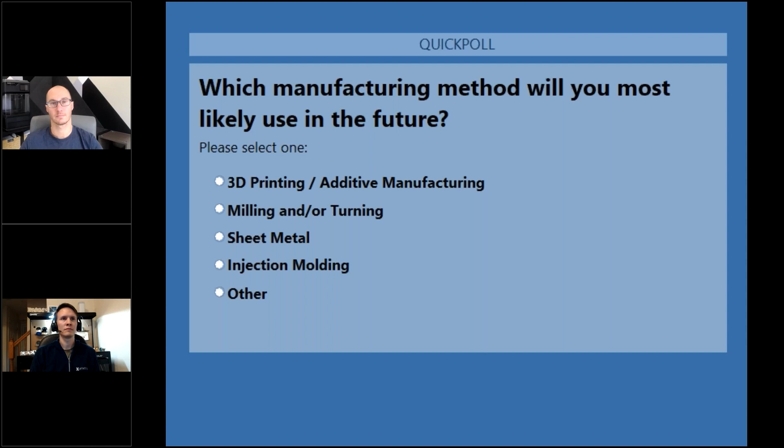Please let us know, which manufacturing method will you most likely use in the future? 3D printing / additive manufacturing, milling and/or turning, sheet metal, injection molding, or other. We'll give you a moment to respond. So here are the results. At 36%, we have 3D printing / additive manufacturing, 29% selected milling and/or turning, and tied at 14% selected sheet metal or other. Thanks so much for that.

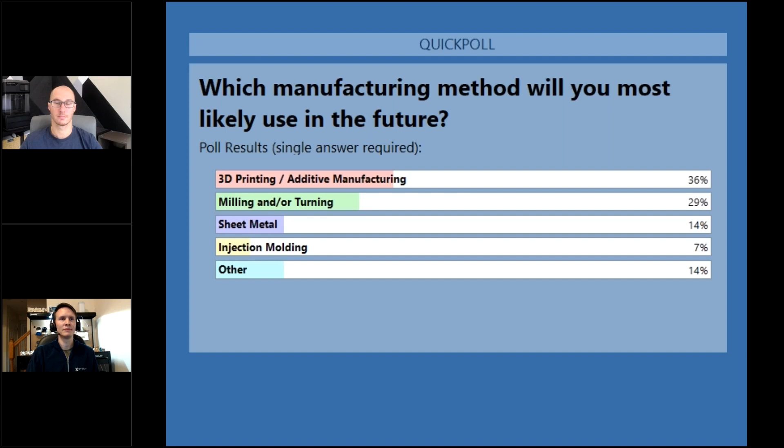And we're going to launch one more. Please let us know, what is your current or primary CAD software? Fusion 360, Inventor, SolidWorks, Creo, CATIA, NX, or Onshape, or other. We'll give you a moment to respond. And here are the results. 36% selected Creo, CATIA, NX, or Onshape, tied at 29% selected SolidWorks or other, and 7% selected Fusion 360. Thank you for everyone who participated.

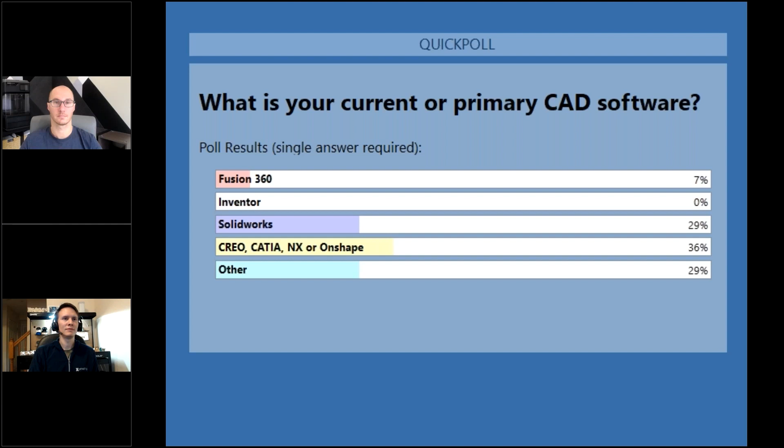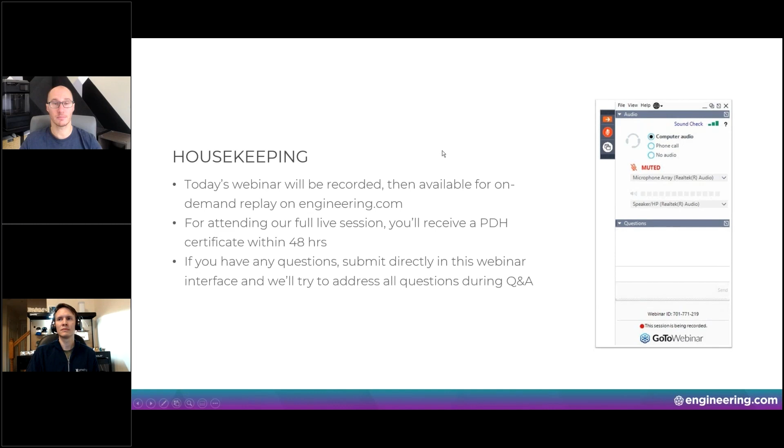Today, we're going to be talking about avoiding production pitfalls using manufacturing-aware generative design. We have a packed agenda, so let's actually go through that agenda together. We're going to tell you a little bit about ourselves, as we're going to be talking quite a bit today, so we want to have you get to know us. We're going to give you an intro to Autodesk and to Xometry. Perhaps you're only familiar with one of those two companies. We want you to be familiar with both. Then we're going to hand it over to Greg. Greg is going to talk all about what DFM is and what that acronym actually stands for and why it's important. And then I'm going to take over.

We're going to talk a little bit about generative design, how it actually works, and we're going to cover things like how does it create manufacturable geometry automatically, what manufacturing techniques or technologies does it solve for you out of the box, and how you can influence the shape of the part by adjusting the manufacturing inputs. Then we're going to talk a little bit more about Xometry and how you can use the Xometry for Fusion 360 app to get DFM or design for manufacturing feedback, as well as instant quotations for third-party manufacturing. Finally, we're going to talk about how you can modify a generative design result for alternative manufacturing methods.

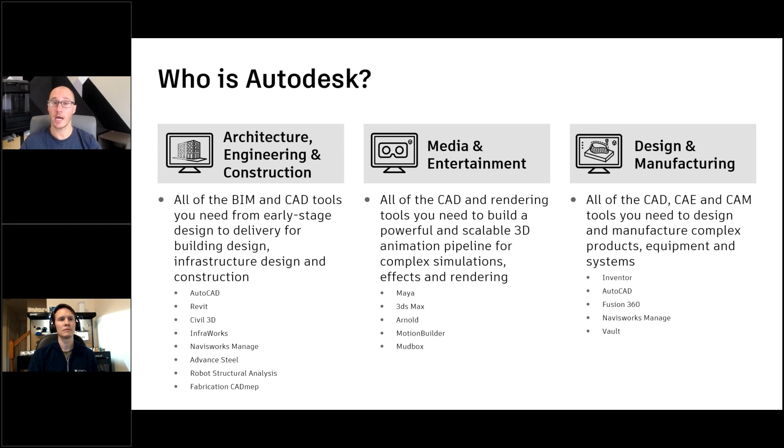But I'm in the design and manufacturing sector. And the design and manufacturing sector is all about taking ideas and turning them into real products, physical products, whether they're simple or complex, whether they're individual products, equipment, or even systems. Again, we have a variety of different products within that category, but I represent Fusion 360. So what is Fusion 360? Fusion 360 is a platform.

It's CAD or computer-aided design, it's computer-aided engineering or CAE, and it's computer-aided manufacturing or CAM. It can be used for anyone and by anyone, starting with industrial design to mechanical engineering, electronics engineering, manufacturing, and even production as well. Again, Fusion 360 is intended to be the platform so that everyone in your team working together can help design and then manufacture that product.

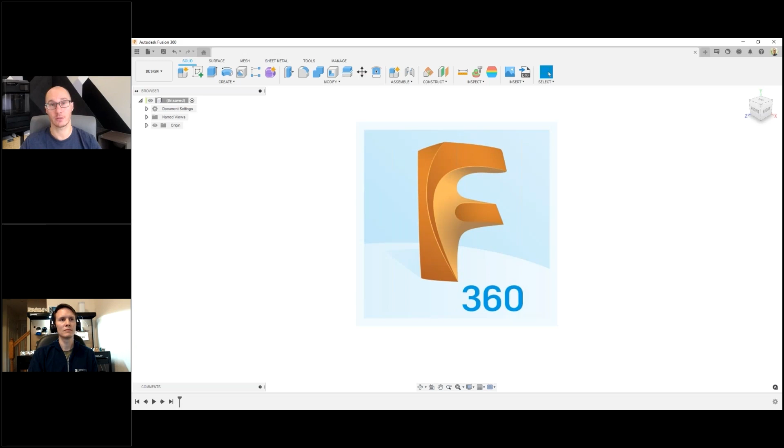Fusion 360 is cloud connected, and that enables you to have automatic file storage and versioning, as well as easy collaboration amongst your team, both internally and externally as well. Fusion 360 does a lot of individual things, but the most important thing to note is that it's not about any one of those things, it's about being able to do all of those things under one platform.

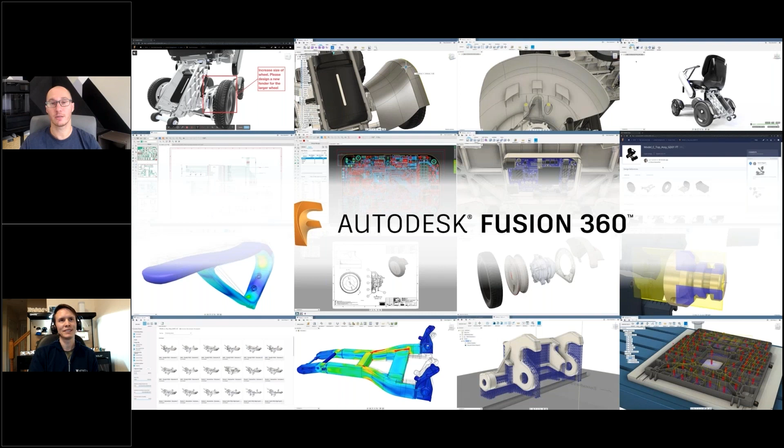Today, we are going to be focusing specifically on generative design, and it is my pleasure to represent the Autodesk side of things. But we also have Greg from Xometry. So with that, let's hear a little bit about who Xometry is. And with that, we have a quick video to play for you. It's just a moment while I turn that on.

What if you could access the world's manufacturing capacity with a few clicks? What would you build? Xometry puts manufacturing at your fingertips. Get instant online quotes on 3D printing and CNC machining. And access thousands of manufacturers worldwide. With Xometry Manufacturing on Demand, it's your time to build. Visit Xometry.com today. Short and sweet.

Yeah, so that's a little preview of what Xometry does. And what we are is a global manufacturing marketplace. And I always like to tell our customers, what's in it for me? We make a ton of parts. We can make parts on demand for you. And we solve a lot of these traditional procurement problems that you may have. You're trying to figure out who to source with, who's going to give you the best costs, all that.

We actually use a single platform. We use AI and machine learning to give you pricing as well as feedback on your parts. And even when you buy, we're actually doing the whole supply chain for you. So we're connecting your work almost as Uber connects drivers through its platform.

We're connecting work with manufacturers that do that type of work really well, whether it's a sheet metal part, a CNC part, injection molded, or one of the multiple 3D printing processes that we offer. But we're a one-stop shop for manufacturing.

And why it's really exciting when we work with Autodesk is because Autodesk has the output of the CAD file. So our instant quoting engine takes that 3D model, it's a secure file upload, and it'll interpret and give you that pricing. And this is a free tool to use. And we're even going to show later on that we have add-ins for things like Fusion 360, Inventor, and SolidWorks. So you actually have access to some of these quoting tools on demand directly in the CAD instance.

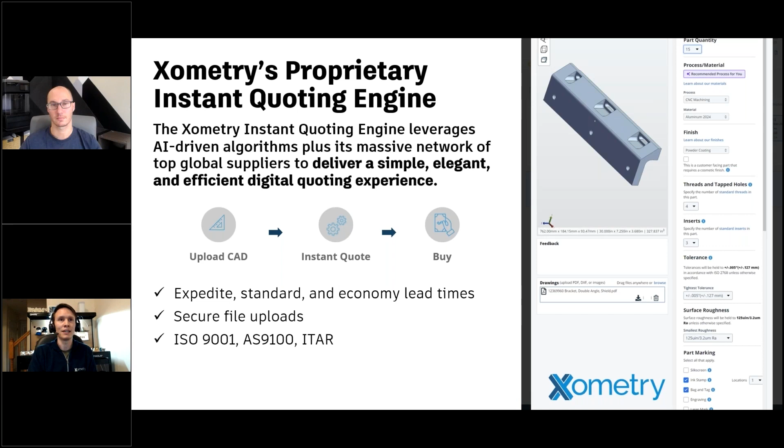But what it really comes down to, we make parts, and in my life I've also seen a lot of parts from a lot of different industries, whether that's AM, whether that's subtractive, like 3, 4, 5 axis machining, sheet metal brake bending, and even casting processes. So whether it is that low volume production or low volume prototype need to full production needs, we're one place, and we're happy to work in parallel on multiple projects.

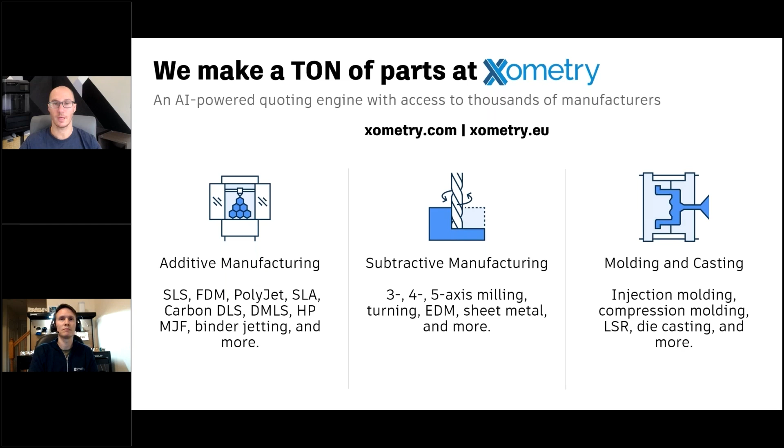Excellent. Next topic we're going to talk about today is, what is DFM and why is it important? So Greg, can you tell us what that DFM acronym actually stands for, and why should I care about it? Yeah, absolutely. So what do I do all day is your real question here.

But DFM stands for Design for Manufacturing, or Design for Manufacturability. This is where the rubber hits the road when it comes to your CAD intent, and that intent for it to actually be something physical, like a physically produced product. DFM is the consideration of the manufacturing process and material within your design effort, because different manufacturing processes have different rules just by the way they actually fabricate, the way a mold tool opens and closes, the way that a CNC tool spins and creates features.

When you're adding that design intent during the process, what you're really doing is also reducing costs, things that can hold up the job, like production risks, you're reducing delays. So for example, if you order a CNC part and you have some DFM features that we cannot produce with that process, we may need to put that work on hold, ask you a few questions for some exceptions, adding a radii here, for example, but that may cost you some days.

So being able to do that somehow, some way, while you're in the design process will save you a whole lot of conversations and headaches on the tail end when it comes to actually producing that part in your end use process. And DFM just helps manage those expectations too. What I design is what I'm receiving. And that's a really big thing when it comes to custom manufacturing, for sure.

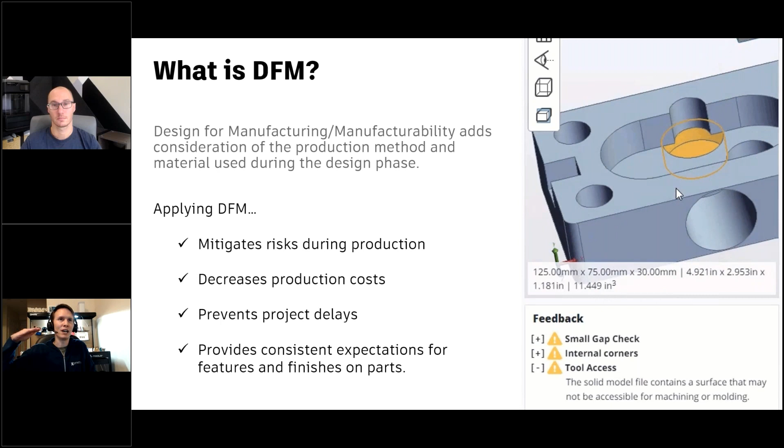So I'm not going to read through all the text on these examples, but I do want to show some of the most common things that we see at Xometry that are DFM issues that we may flag post-order, or we may catch pre-order and ask for a slight modification. There's really two reasons why, and it's all around how this machine works.

I'm CNC machining, I'm holding my part still and stable, and I'm spinning a tool to go through and either drill or cut and create the features of my part. There's a few things that happen. First off, that tool's spinning, so that cross profile of the tool is always a circle. That means that if I'm trying to cut a square corner, I can't. I'm always going to have a round there.

So that middle one, for example, rounding internal corners, super common thing that we see as a DFM kind of stop. It usually is adding a 32nd radii or something like that to mitigate that issue. The other thing is I have a metal tool, I have a metal or plastic part, I'm holding them still, but as things get thinner or as things get deeper or longer, stuff can tend to vibrate because I'm moving super fast with that tool.

So thin walls are an issue with DFM and CNC because it may vibrate that wall and create a chatter feature or deformation on the part as it's being produced. And the same thing with drilling. If the tool gets too long to access that feature, it could also vibrate and cause a similar issue. So, when you think about that, this is how the process dictates parts need to be built, and having those considerations really help out. Let's go to examples.

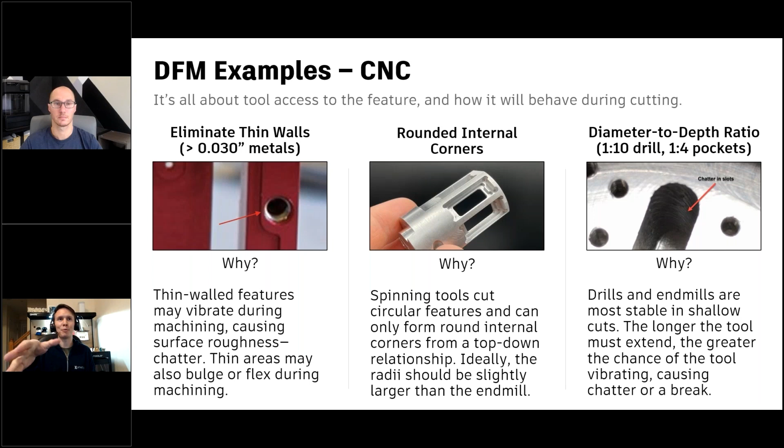Thin walls are typically the largest rejection criteria that we see on 3D printing. We may be able to move to a more sensitive process for thin walls, or just thickening up will take you a long way. Sometimes the programs that actually program 3D printers will look at a thin wall and say, you know what, I can't do it. It won't exist. And it doesn't even actually make it to the machine. That's how sensitive sometimes these issues are.

Same thing with thin gaps where there's nuances in the process that may actually fill or fuse or create an issue where material's trapped and cannot be escaped from that. So we have design rules against that. And then ultimately, unlike CNC where I'm fixturing a part and holding in place with a set fixture, I need to kind of build that fixturing, the holding situation of my parts in most 3D printing processes while I'm actually making that part itself. And so that's support structure.

This is a sacrificial structure that needs to get removed. When I remove that, it does leave little nubs and possibly some surface defects, and it can affect geometries. So minimizing that is a great DFM tip to help create a more consistent expectation. So Greg, you're talking a lot about these rules that you need to follow. Yeah. How hard are those rules, so to speak? Like, can you break them? Or is it really just about knowing what the rules are so you know when you should break those rules?

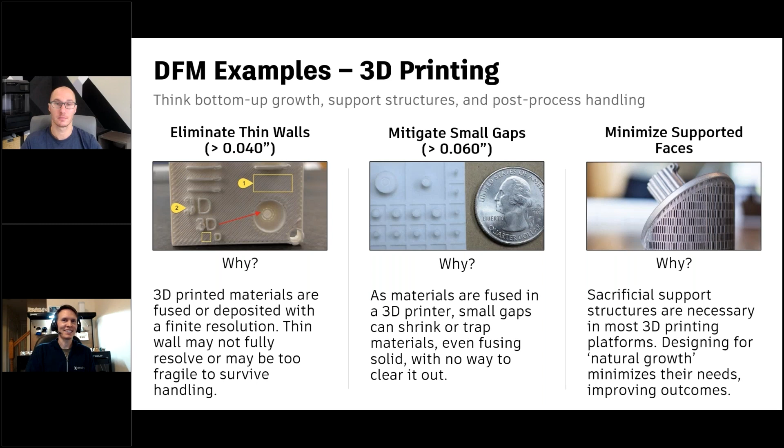Well, let's segue into the next slide because I think we're right in the same world there. It is a sliding scale, right? It's a continuum. The reason why is that, yes, I can create specialized tooling and I can procure it. So a lot of times I get a question of, can you make it? And unless it's something that's impossible to access with any tool that exists, the answer is yes. The real question is, should I make it or should I incorporate that in my design? And that also plays with quantities a lot of the time.

We actually found that it was better to manufacture, and ultimately cheaper to manufacture, by disjoining those features, creating two separate parts. So even though I'm making two parts, it actually mitigates risk on the production line. I can make it faster. I save about $400 a set on producing these. There's massive value added with that design for manufacturing aspect, especially when you think about production. It's more and more sensitive there.

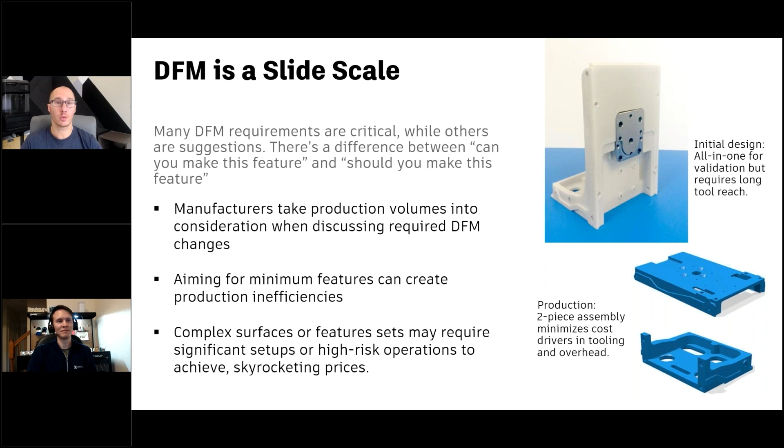Now, all these rules you were talking about, I have the feeling that if I'm designing something manually, I want to keep them in mind. So what's the best resource to find all of those rules? Oh yeah, so part of my life is trying to take this tribal knowledge of making and breaking parts throughout my career, as well as the knowledge of all of our experts in manufacturing at Xometry, and national standards, and putting them into documents and videos and resources through Xometry.

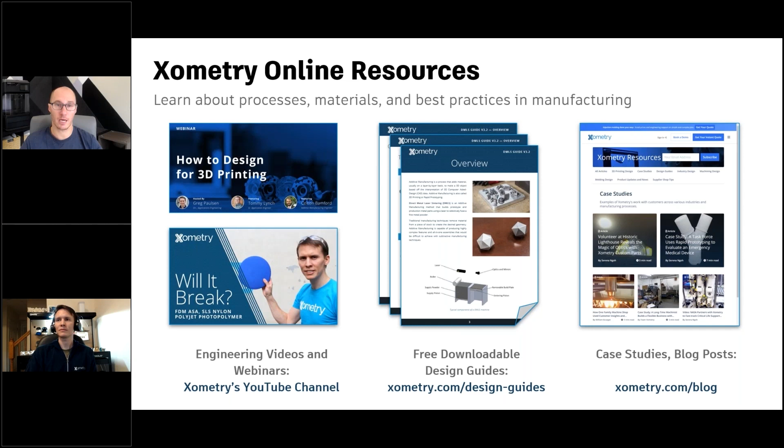Excellent. So we talked quite a bit about what DFM is and why it's important, and some resources to learn more about DFM for your particular manufacturing process. Now we're going to jump into a slightly different topic. We're going to talk about generative design and how generative design's manufacturing awareness is going to allow you to design your parts faster and, of course, design better parts.

So the first step is to understand what generative design actually is. Generative design is a design exploration technology. It simultaneously generates multiple CAD-ready solutions based on product performance requirements and real-world manufacturing constraints. The emphasis here today is on the real-world manufacturing constraints.

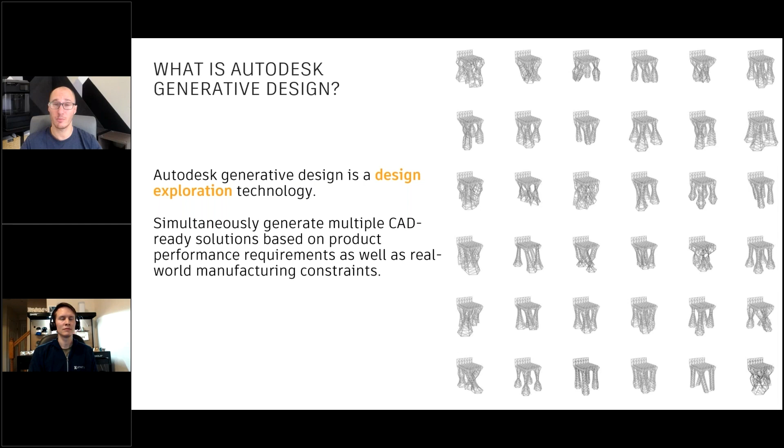So you're going to tell generative design how you are interested in manufacturing this part, or the multiple ways you're considering manufacturing the part, and it's going to give you different solutions to the problem for each of those manufacturing methods so that you can compare and contrast the pros and the cons of each of those different options, the trade-off, so to speak. And having those options early on is going to help you considerably, and you'll see why in just a moment.

The why really stems from the goal of engineering as a whole. I'm a mechanical engineer by background, as I mentioned earlier, and I've worked in industry, so I've seen this firsthand, that the goal of engineering is to strike the right balance between the performance and the cost for a given product. And when we're doing this exercise, the performance can mean many different things. It could be trying to make the part as small as possible, as lightweight as possible, as stiff as possible.

But really what we're trying to do is to try to find that balance between whatever we're considering high performance and the cost. Sometimes a performance gain is just not worth it because the cost jumps so dramatically. And typically we're doing all of this under a tremendous amount of pressure. We're limited in time and energy that we can spend on any design problem to really fully explore all the options that are available to us. And when I say limited in time and energy, I also mean limited in resources, limited in money that you can actually spend towards solving that problem.

Are you saying that you have overhead? Yes, we have overhead and budget, and sometimes our corporate card has a really low limit also, Greg. Yeah. You know, we're always trying to do more with less, so to speak.

Have you found that in your world as well? Absolutely. Especially when I was working in product development, you had direct labor, right? And there's what you call LOE, or level of effort against a program, which you're hoping to stay in budget because that's what was budgeted when the bid was set out for the customer. And if you can do more digitally, quicker, it does bring you to a larger advantage when you are working on the results side of things. It gives you much more leverage, and often you get better results. And we see that with iterative rapid prototyping of products, but being able to iterate on the digital side is just as important, if not more.

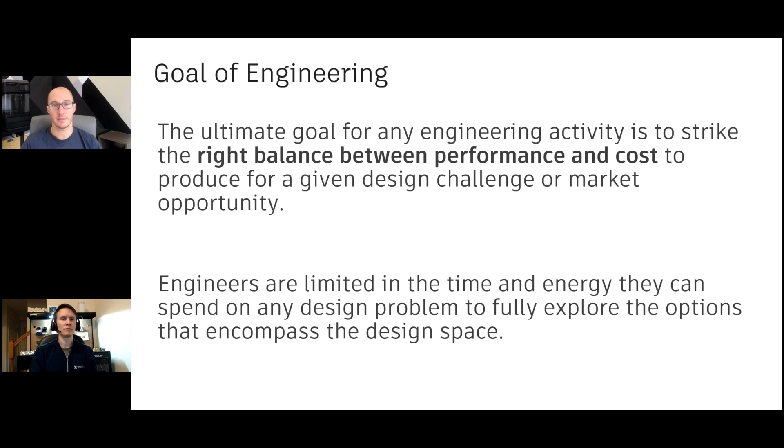The balance between the performance and the cost becomes much more nuanced. And the difference in that balance is what makes each of these vehicles unique, so to speak, what makes them have its own market as well. And it's important to recognize that balance because ultimately that's what you're going to be doing as well in your product design. So this is just an example of that in the vehicle world, but you'll see many more examples of this coming up as well.

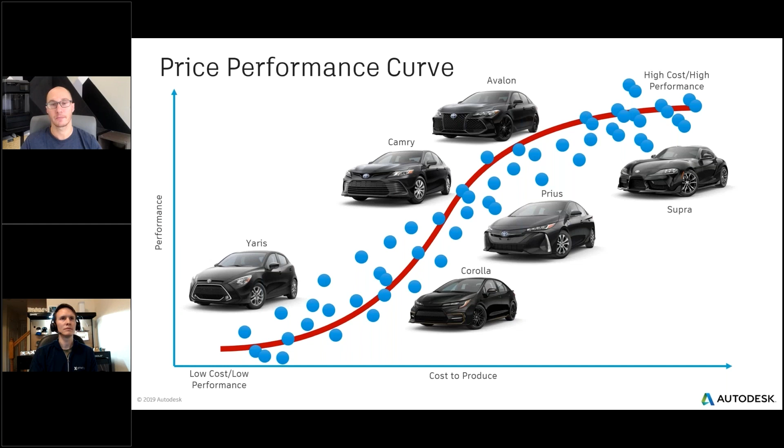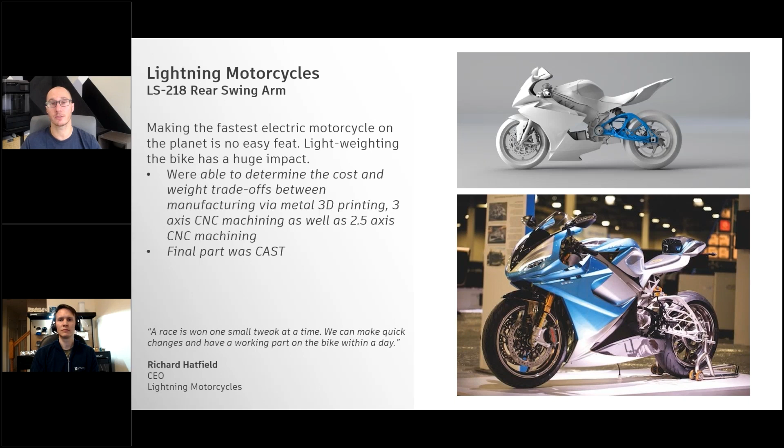And again, we love vehicles, so here's one more. This is an Autodesk customer, Lightning Motorcycles. They make the fastest electric motorcycle on the planet. And they use generative design to help them lightweight their motorcycle so that they can go even faster. We're going to focus on the rear swing arm of this particular motorcycle. You could see it in the upper right-hand image in blue, but what you want to see here is that they were able to evaluate the trade-offs, and the final part was actually cast. So while it's going to look like a 3D printed structure, keep in mind that you can very much manufacture these parts in traditional means, whether it looks like it initially or not.

So with that, let's look at the typical product development process. We try to get as many concepts as we can as early as we can, but again, we have limited time and resources, so we don't get that many. And then we start to evaluate them for the performance and the manufacturability. And if we have to rework that design, like that two-piece construction that Greg showed earlier, you might have to restart some of this again, making delays to your process.

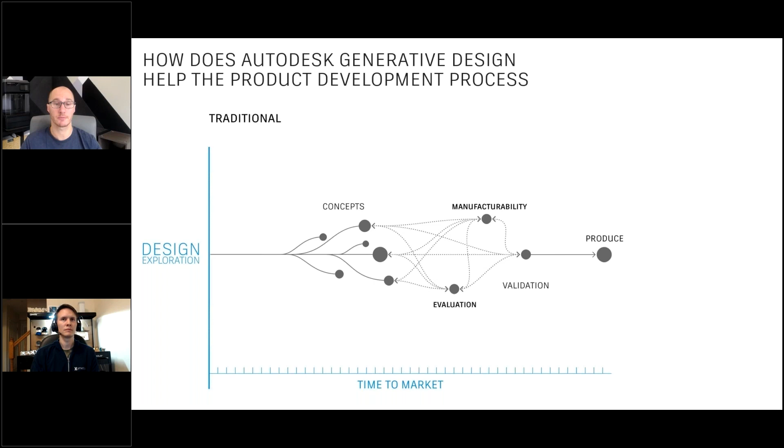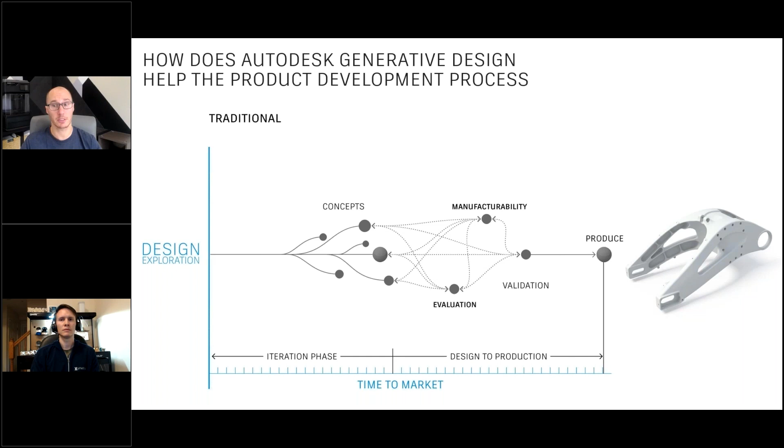But eventually you're going to end up with a final part. In this case, the rear swing arm of the original motorcycle. And while it looks like a good product, it actually looks like a great product from a traditional sense. With generative design, you could do even better.

So here's what the generative design process will look like. You get multiple validated manufacturable options earlier. And the emphasis here is that they are pre-validated to be manufacturable. The design for manufacturing that Greg was talking about earlier, and is so critical for you to be able to go from that idea straight into production, that's already been done by Autodesk.

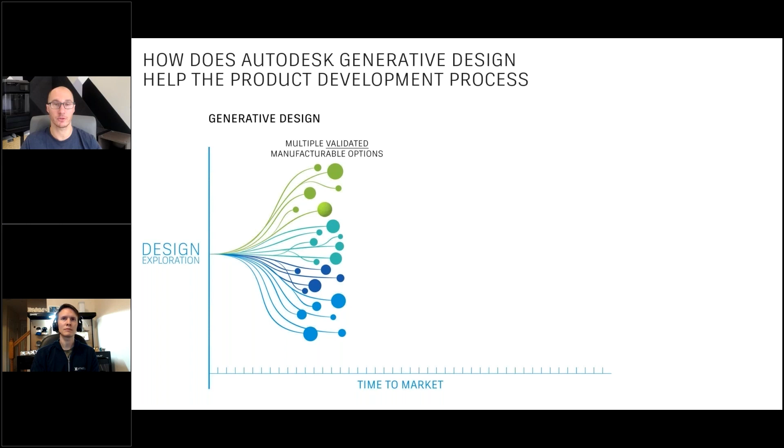Using artificial intelligence, Autodesk is able to create multiple solutions for your problem that are based on that performance requirement that you give it and the real world manufacturing. And the result is that you can get to production much faster and yield a significantly better product.

So on the right, you can see the final result. Again, this is a cast result, even though it very much looks like it should be for 3D printing. But the emphasis here is that not only are you able to get a better product, you're able to get it much faster. You have a significant productivity increase and you get to market much faster as a result.

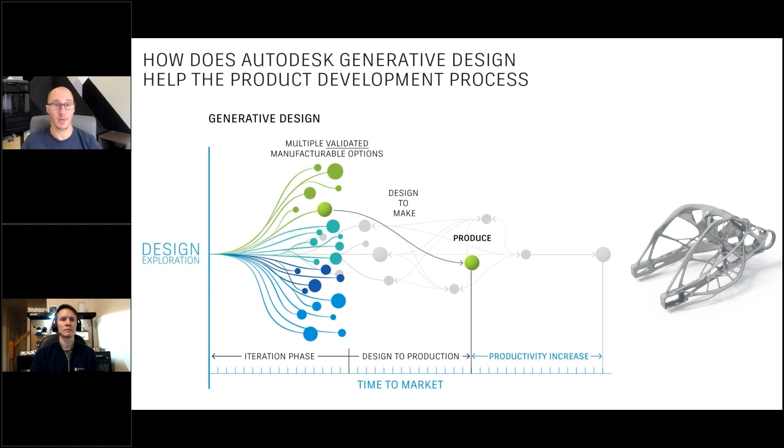Yeah, it's really just interesting because I think we were showing the slide earlier. We were talking, and I was like, one of the things that generative does is it creates solutions that are not intuitive. It's not the way that you traditionally think about manufacturing, and we even talked about that in CAD software. You know, you usually see a cut, extrude.

You see linear motions of things, and generative just looks at the purpose. You know, looks at what is your purpose, what is your goal, like on that line you were showing. And in this case, this is definitely a lightweight, high value performance component, and this is the outcome of that.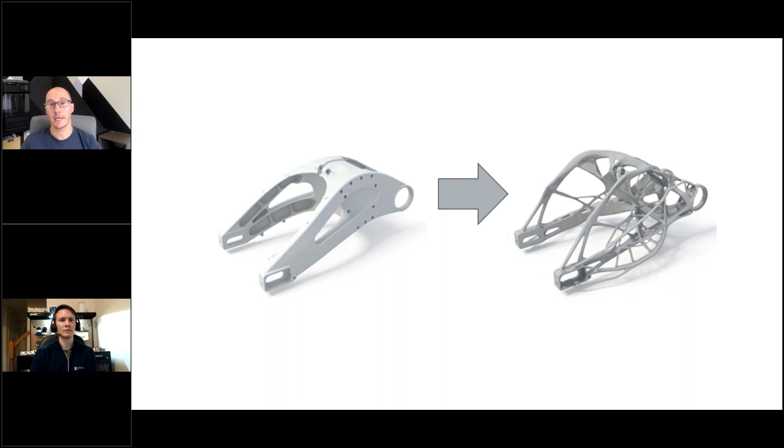That's exactly right. But again, the key is that you're going to get lots of solutions to the problem, not just this one. And you get to choose the right balance between those trade-offs. And as you're analyzing those different trade-offs and the different results, keep in mind that you can analyze them both qualitatively, like looking at them aesthetically, but you can also evaluate them quantitatively.

So you get to see the weight versus the safety factor, the stresses versus the safety factor, the stresses versus the cost, and a whole lot more. You can even export your results from Fusion 360 to Excel if you'd like to do further statistical analysis as well. So the point here is that you get the best of both worlds. You get to compare it both aesthetically or qualitatively, and you also get to compare it quantitatively as well.

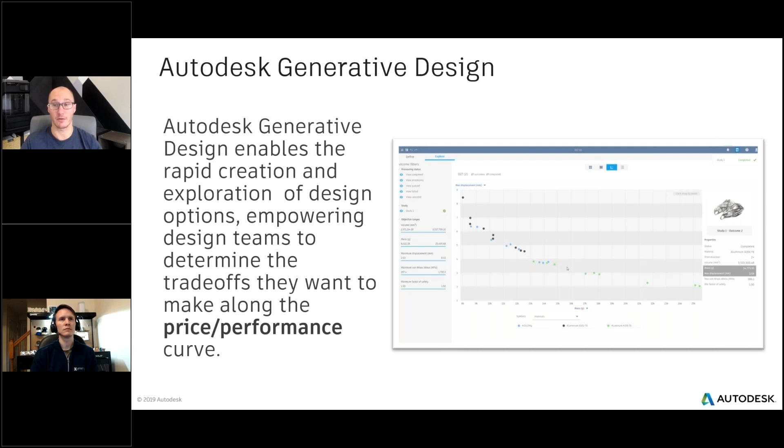It's cool stuff. So with that, let's actually show you what this looks like. I have a brief video that's going to explain this much better than I could do just talking. So give me just a moment while I queue up that video.

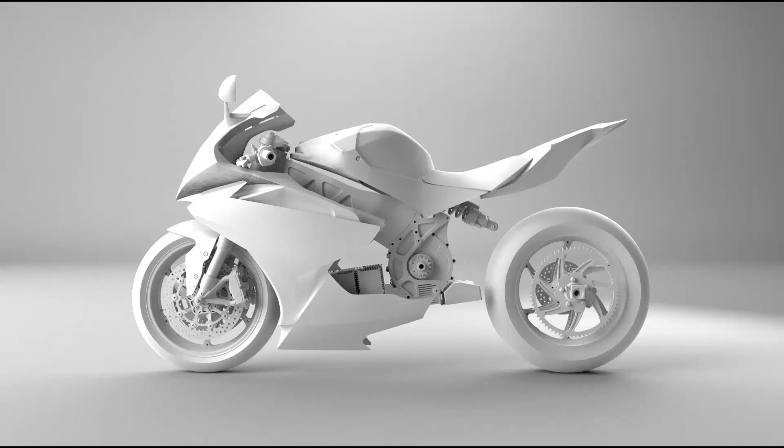Perfect. So again, we're looking at the rear swing arm of this particular motorcycle. And the items that you're seeing in green are what we call preserves. They are the connection points that this item or product is actually trying to connect. After all, a rear swing arm of a motorcycle has a purpose, just like Greg was talking about. And that purpose is to connect the main frame of the motorcycle to the rear wheel.

These are the connecting points that are intended to be connected. And the green items, or the preserves, are the geometries that must be in the final result for it to function. But just as important as it is to know what must be in the result, it's also important to know what must not be in the final result. So we also have obstacles as well. I'm going to go and play the video again so you can see the obstacles too.

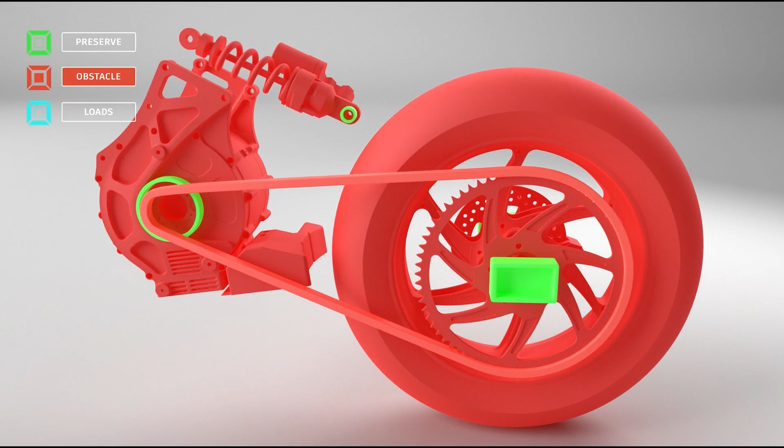So here you can see the obstacles being generated. The obstacles themselves can be the actual geometry of your product. So in this case, the wheels, the sprocket, the motor, the shock absorbers. You can simplify those geometries using generative design tools that are built right into the application. And you can also expand them to increase the gap, so to speak, between your parts, so you can make sure that you're going to get a nice fit.

And it also helps not just for design for manufacturing, this also helps for design for assembly, or DFA, another acronym that Greg loves. So generative design allows you to specify where your part must be as well as where it can't be. And to be clear, for any of you out there that happen to be aware of shape topology optimization, generative design is very different than that. It works in a very different way.

And the way that generative design works is able to add material just as much as it can remove material, but it adds perhaps a little material here to remove a whole lot of material there. And that's very important. It's not just taking a final result and chopping out holes, it's actually generating these designs from scratch. And it's doing that with manufacturing awareness so that you get those parts that are already ready for manufacturing. I'm gonna hit the play button again so you can see the rest.

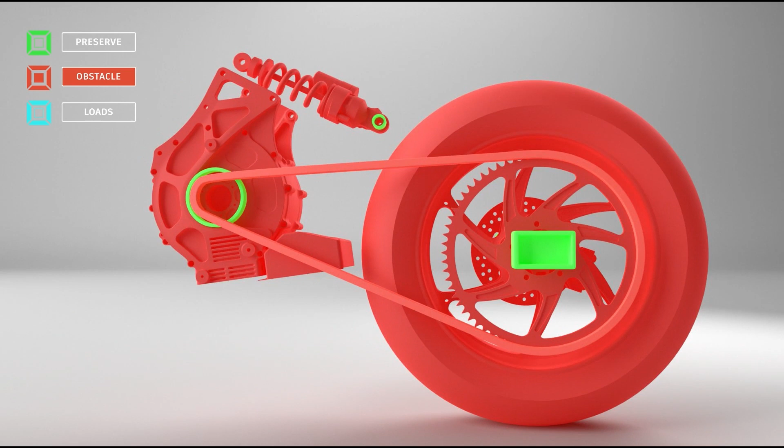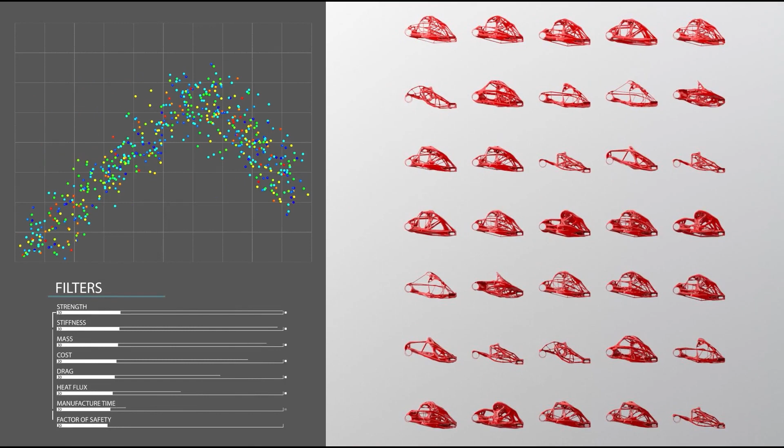So now it becomes somewhat of a standard FEA study, or finite element analysis. You provide the loads and the boundary conditions. You tell it what kind of manufacturing methods you are willing to explore, and it's going to generate not tens, but potentially hundreds of different results based on all of those inputs. You can filter those results based on a whole bunch of different criteria, qualitatively as well as quantitatively, and pinpoint which are your top 5 choices, or top 3, or even top 2 choices.

But once you do, now you get to compare that balance that we talked about earlier, whether it's worth saving an extra 100 grams and doubling your price. Sometimes it is worth it. I mean, if you're designing the lightest motorcycle on the planet, then it might make sense. But if you're designing that Toyota Camry or Toyota Corolla or Avalon that we were talking about in that analogy earlier, then maybe it doesn't make sense to double the price, right? So it's really about analyzing what makes the most sense for your particular project.

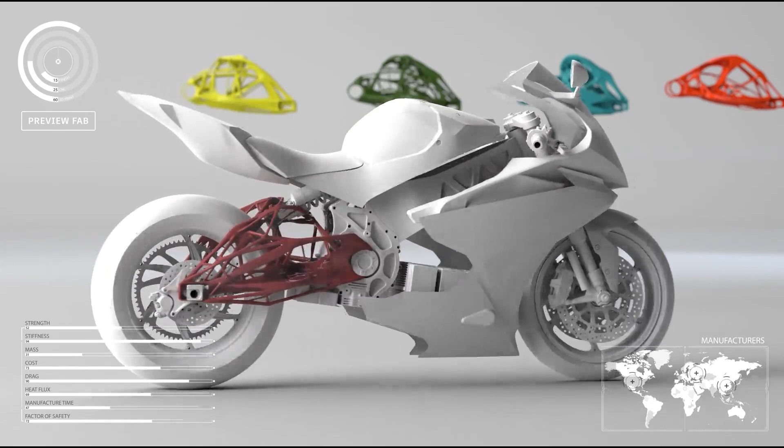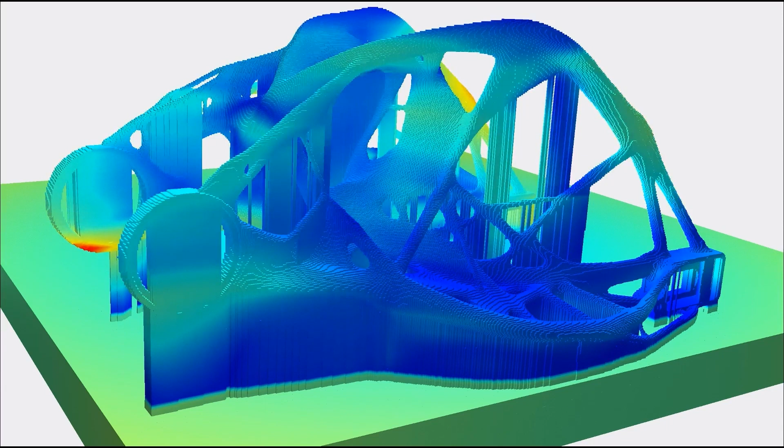Once you analyze what is the best choice for your particular project, then you could go and start manufacturing it. Fusion 360 is a CAD, CAE, and CAM solution. So if you do have in-house CNC machines or additive machines, you can utilize Fusion 360 to control them, output G code for the 3D printer or for the CNC machine as well. But if you don't have all of that capability in-house, or maybe you do and you just don't have as much capability as you'd like, that is the perfect time to start including Xometry in the equation as well.

So let's go back to our normal slide and let's talk about how you can incorporate Xometry into your process. So first, let's cover the workflow. All right, the workflow is define the problem, generate your results, explore the results, and of course, pick the best result for your application. When it comes to manufacturing, we have a lot of different manufacturing methods that are available. Additive manufacturing, which of course is going to give you more organic shapes. We have die casting. We also have quite a few options in the milling arena for 5-axis machining, 3-axis machining, 2.5-axis machining, which I think is my favorite of the bunch. I think, Greg, you might agree with that as well. Yeah, we'll talk about why when we see the results.

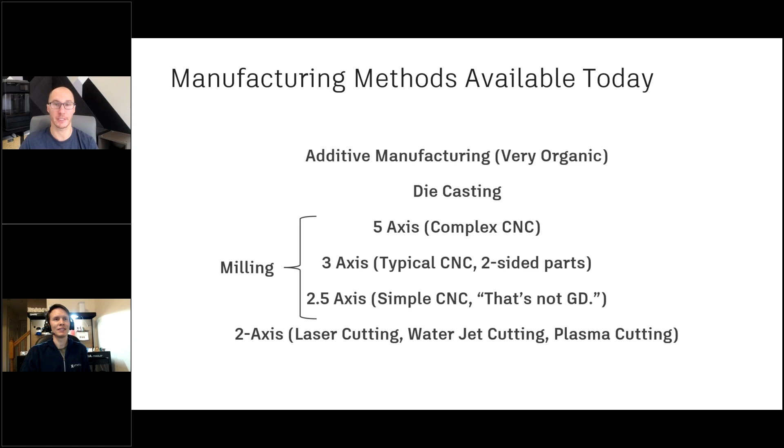Yeah. Exactly. And then lastly, of course, 2-axis cutting, which is for laser cutting, water jet cutting, or even plasma cutting. But of course, you could run this in a milling machine as well. It's really your choice. But if we're looking at examples, this is another great example of what we're talking about. This is a triple clamp for a motorcycle.

You can see a common theme here. We love cars and motorcycles. In my opinion, anything that goes fast and is a little dangerous is fun to me.

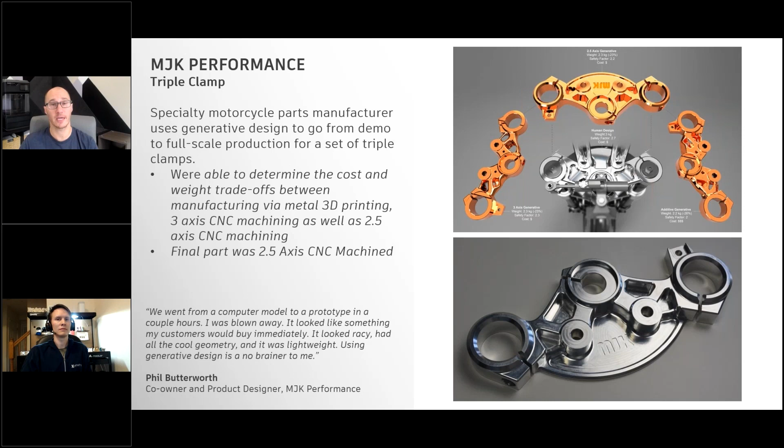But here is an example from MJK Performance, and they design triple clamps that are aftermarket accessories for Harley Davidson motorcycles. And here you can see the comparison between different options for this triple clamp. The final one that they used was the 2.5-axis option. But if you compare the available options, you start to get a picture of what the manufacturing option actually does to the geometry.

So you have a human design on the left, the 2.5-axis generative highlighted in green because that's the one they finally went with. And then you have the 3-axis CNC machining result and the additive result as well. And you can see the very distinct differences in geometries. What's common between all four results, rather, are going to be those preserves, right? Those preserves must be in the final result, but how to connect the dots is what's different.

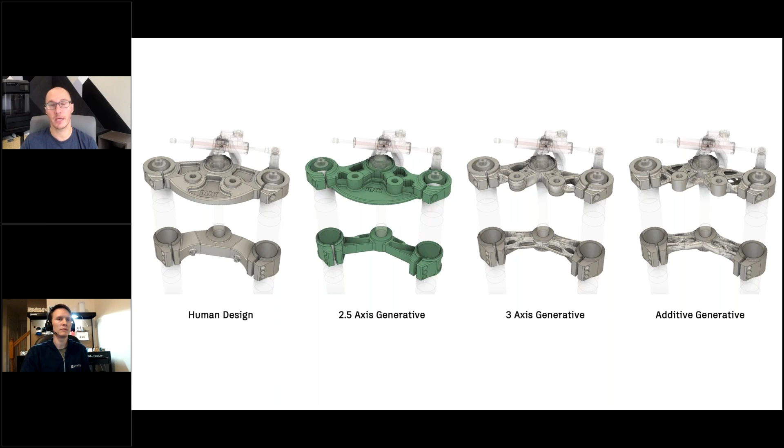And in all of these cases, those dots are connected in a way that is manufacturing aware, that is already designed for the manufacturing. The DFM is taken care of for you. And that to me is so important. And don't forget, it's not all about additive manufacturing, as important as additive happens to be today. It's also about very traditional manufacturing. And so this is the final part here, made in 2.5-axis CNC machining.

And when we first introduced this to the world, the very first comments we got were like this one here from Empowered One. No offense meant at all, but how on earth was this generatively designed? It looks like it's parametric or prismatic, basically like a human designed it. This is actually the best compliment I could get. Absolutely, and this is what excites me.

I mean, I love the organic structures and what you're showing for the motorcycle component, they are very powerful. But the trade-off is a lot of times cost, right? There's surfacing, there's milling, there's extra processes to it. But many people don't think about generative in the way that this picture is depicting it, where you're essentially creating a result that any machinist can look at.

And this is essentially a 3-axis mill with a couple other setups, like a slitting saw for the sides there and some other features. And you can do it on 5-axis too, and do it almost all in one op. But it is a very approachable, manufacturable design.

So the costs are not going to be as driven as some of those organic shapes that are fully milled out. And something you could use Xometry pricing for is to really see that difference, right? Like what a surfacing requirement does to pricing versus something like this where you have vertical walls across the part. Exactly right.

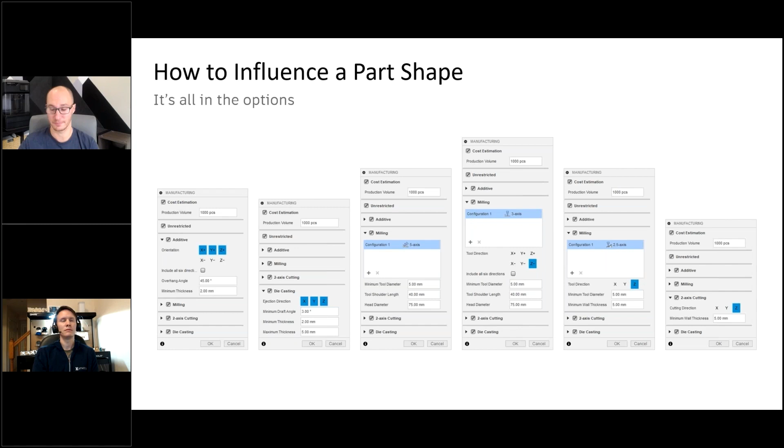So the next question becomes, how do you leverage Xometry for that DFM feedback and for quoting? And with that, we're going to jump live into Fusion 360 itself, and we're going to show you the newly updated Xometry app for Fusion 360. V2.0, yeah. As Jason's opening up Fusion here, we released a Fusion 360 app, so everything that I showed that you could do on Xometry's website by uploading a file, which is always available at xometry.com, we extended into different CAD platforms. Fusion 360 was the latest.

We released that, gosh, how many months ago? It wasn't too long ago, but when we released it, we had the vision of this 2.0 project in mind, more DFM. Also, for folks who are listening internationally, we now have 5 languages in this app, and it serves Xometry Europe as well, and it's able to quote multiple parts. But this is live. You're in your CAD instance, and you're able to see and review pricing right there as you're designing.

Exactly right. So here is the final part, that MJK triple clamp. I've already run this through the Xometry app, but I'll show everyone how to actually do that in a moment. Just so you're aware, it's going to instantly tell you the pricing, the lead time, and also give you the DFM feedback right away. So while you can certainly download the DFM guidelines on the website that Greg mentioned earlier, and we highly encourage you to do that, you're able to get that feedback based on the geometry automatically.

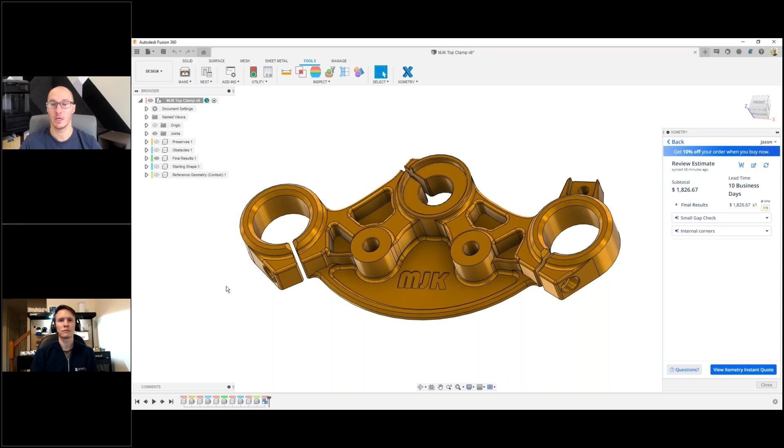So in a part like this, I see the small gap check is firing off, no surprise. We have these slivers on each of these areas. That's where the clamping actually happens. Unfortunately, we can't get rid of those, right? But knowing that there is a small gap and that in order to manufacture it, it's going to increase the price is still helpful. Right?

Yeah, so this is to your point. Sometimes DFM is the difference between can we and should we. In this case, that slit is actually purposeful. I'm tightening a bolt against it to tighten against different shafts on your vehicle. So we have that there to help recommend, but it's not a showstopper. Exactly right. And then we also have some internal corners that we might want to fix. It turns out there are 65 of them, and we could go back in and update the model and of course get updated pricing.

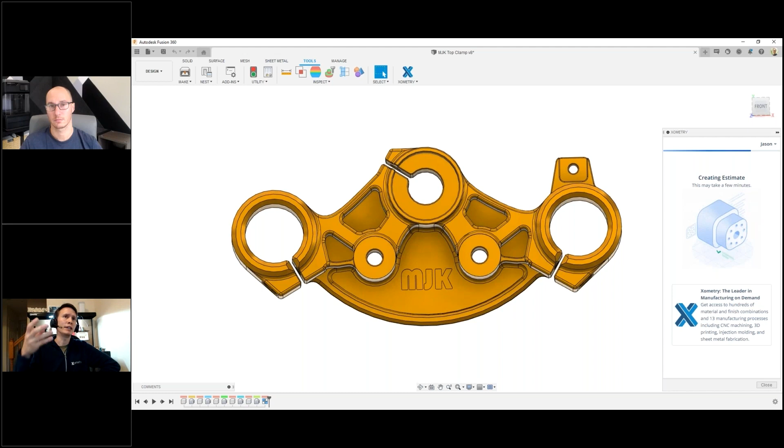What's really cool is you could actually see as you're designing, kind of do this spot check. You could do some modifications of your design, or in this case, when you're talking about generative results, take a look at your different generative results, see what that pricing is going to be. And even as you modify, there's actually a selection where you can kind of refresh the model and see how that price updates. I always like to think about it as like, pricing is part of your prototyping process now, or your product development process.

Sometimes pricing comes at the tail end, or you start getting quotes when you're way down the line, but now pricing can just become part of your overall development process. And again, I know we're doing a live demo here, so let's see if the creating estimate shows, but it should show. It'll show.

But for me, I love that live pricing because it means that I can make a change to my design, get the pricing, make another change, and see how that change influences the pricing itself. So if I'm debating whether or not it would be more cost effective to add a through hole or a tapped hole or this or that, I can actually make those changes, get the pricing, and then based on that, choose whatever makes the most sense for my particular product.

Yeah, and there we go. You just went from about $2,000 to $200 there. And this is FDM 3D printing. You can even expedite that if you jump to Xometry's site to 1 business day turn time. So there's a lot of options to work with. And I think the CNC machining turn time was on 10 business days.

And all these help you get some upper level estimations, but you can really dive deep and specify when you jump to Xometry's quoting site. And that's things like adding threads and tapped holes. If you have different finishes for this, to say this is like a blue anodized component. If you have tighter tolerances, want to add a print or drawing, that's where you'll go.

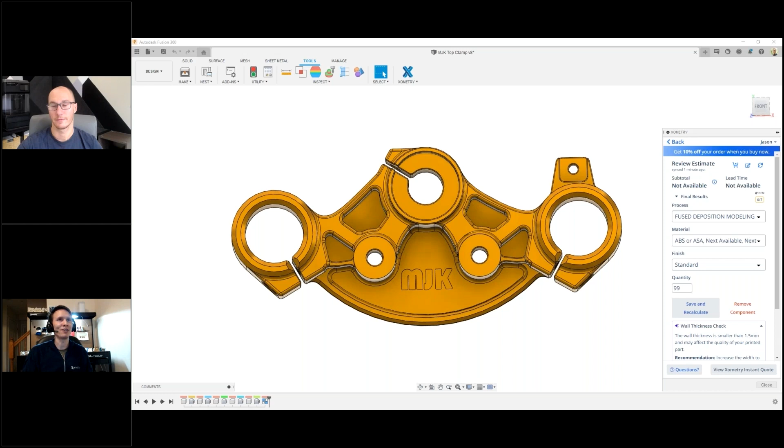Perfect. All right, so the next step, and I believe this is the last topic we're going to cover today, is how you can actually modify the results. And there are a variety of different reasons you might want to modify the results. They might be for aesthetic purposes or even for alternative manufacturing methods. And so let's look at how you could actually do that. So first, a couple of examples.

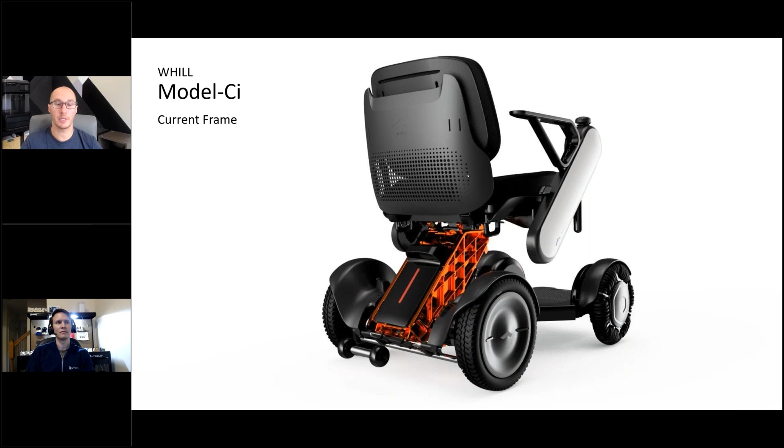Here you could see a wheelchair. This is an incredibly modern wheelchair by a company called WHILL. The orange piece in the middle is the current frame, or at least the previous frame. And with generative design, they were able to get it to the following. And it looks a lot lighter.

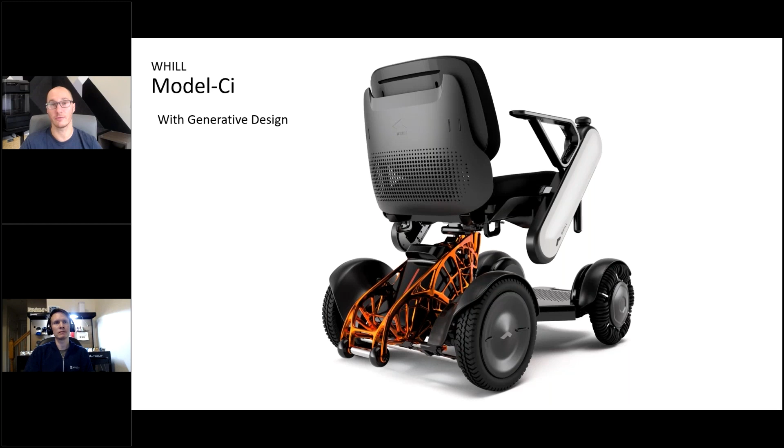It actually is a lot lighter, but then the aesthetics also become part of the form factor of the product itself. But if you look at the results that were initially from generative design versus the modifications, you'll see that the one on the left has a little bit of what I call wibbly wobbles, and the one on the right is smooth, more uniform, and much more aesthetically pleasing.

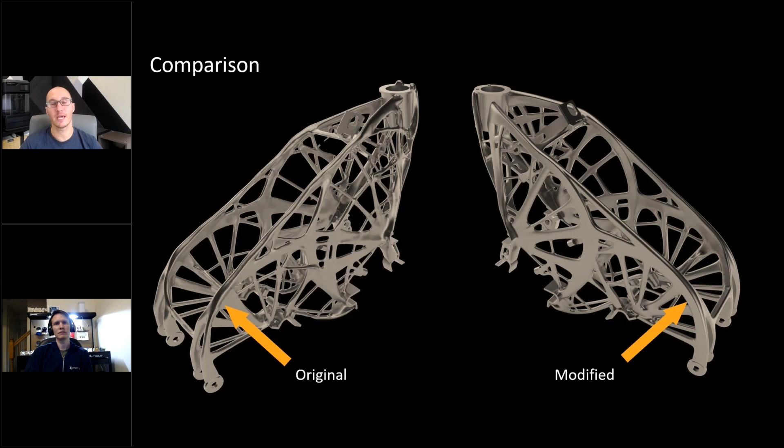There are a lot of different ways to make modifications like this. You can modify the original data using the sculpt or form modeling in Fusion 360. The output of generative design is not always just an STL model. It can be a whole lot more than that. It can be a parametric design. So you can use the sculpt or form modeling to make changes to that model and sculpt it until you're happy with the aesthetics.

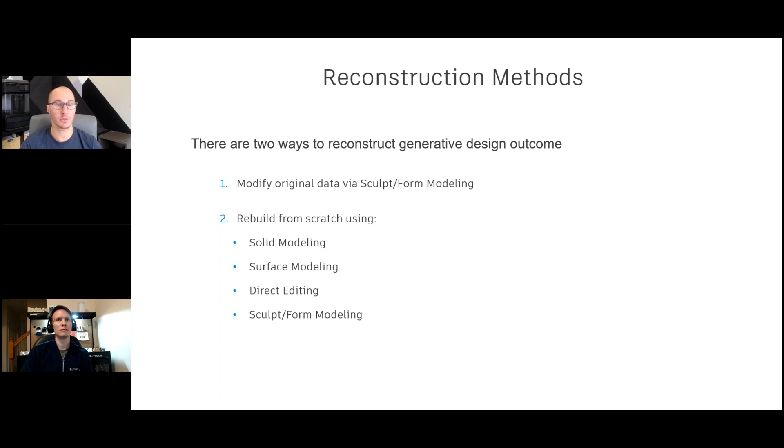You can also rebuild from scratch using a variety of different methods. Traditional solid modeling, traditional surface modeling, direct editing, or again, using the sculpt or form modeling. But you are not bound by just these options. There's a whole lot more as well. So how do you do all of this?

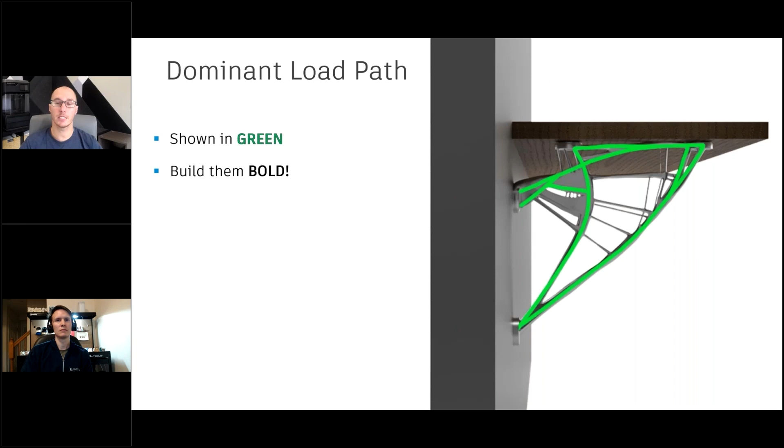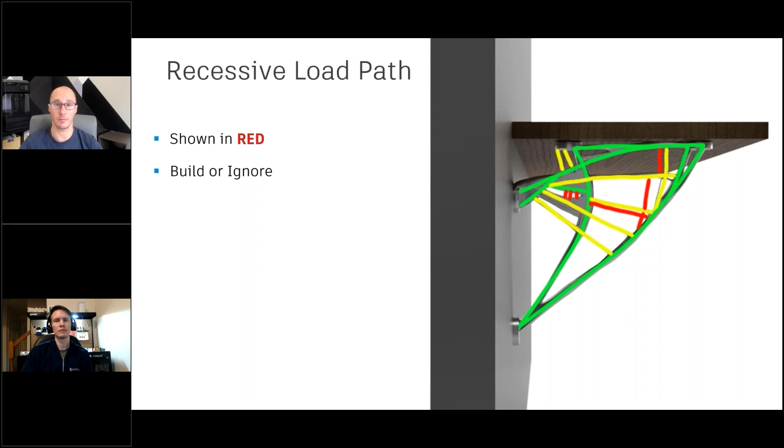Here's an example of a shelf bracket. From a side view, you can see it looks pretty unique, but if you start to analyze what's inside here, you'll see that the areas I'm highlighting in green are the dominant load paths. In yellow, these are the subdominant load paths, still important, but less important. And the areas in red are the recessive load paths. You could build them or you could ignore them. And using this information, you could rebuild this particular bracket in a variety of different ways.

But you can also rebuild this from scratch using traditional solid modeling, or you can rebuild this from scratch for sheet metal. And the emphasis here is that sheet metal is not one of the manufacturing methods listed in the methods that are available. So keep in mind that you could always rebuild your design based on those load paths in a variety of different manufacturing methods. There are a lot of different options to choose from.

And one example that Greg and I like to talk about is how there are even additive manufacturing processes like HP multi-jet fusion and SLS that tend to benefit from some of those requirements for injection molding. But die casting is one of the options from generative design. And die casting, if you set the minimum wall thickness and the maximum wall thickness to be somewhat close to each other, can yield results that are nearly nominal wall thickness, which are great for injection molding, also great for SLS 3D printing, also great for HP multi-jet fusion 3D printing.

So just keep in mind that the manufacturing methods that are out there are incredibly useful for even more than the label might imply. And if you want to go even further than that, you can always use the techniques I showed just a moment ago to rebuild the model from scratch using any manufacturing method you can conceive of.

And so with that, we are at Q&A. Maria, do we have some questions from the audience today? Yes, we do. Well, thank you, first of all, for that great presentation. And here's our first question. Consider a car's trailing arm generatively designed, as in the lightning swing arm. At some point, the lower chords of the trailing arm may be used as a jacking point. What loading scheme should be used to ensure no damage in such a case?

Great question. So it sounds like this particular viewer is already thinking about how they're going to use generative design for their business. I love that. It sounds like that application is going to require multiple load cases. We didn't talk about it earlier, but you don't have to be limited to one load case. Just to define, a load case can have multiple loads in it, but different load cases are for different loads that are not happening at the same exact time.

So the trailing arm that you described could have one load case for the resting position, one load case for while it's under this type of load, and another load case under a different type of load. And it sounds like being jacked up would be one of those load cases. Jacked up, yeah. That's actually a really interesting application. I really enjoy that question because we were talking earlier. I was like, that's my type of question too.